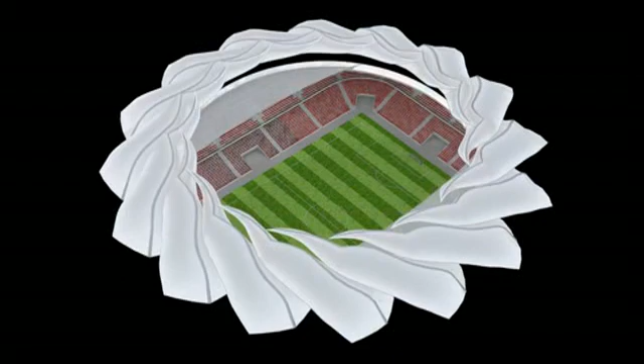The site is located in the heart of Warsaw on the bluffs and slopes of the Vistula River, where the city was first founded in the early 1300s. The model shows the site with its urban adjacencies in proximity to the riverfront.

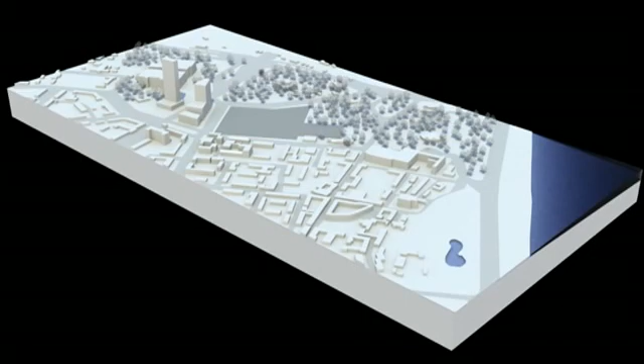This rather constrained 5-hectare site has to accept 4 major elements of the program for the proposed new facility: a 30,000-seat elite-class stadium convertible into a fully enclosed arena, a 5,000-seat basketball arena as a separate venue, a hotel spa facility, and a retail component serving both the guests within as well as the general public.

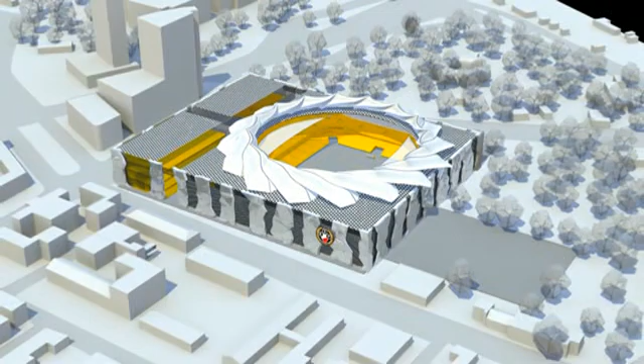The location on the slopes of the west bank of the river is saturated with history and closely intertwined with modern-day urban substance. The medieval retaining walls punctuate the sloping terrain and mark the highlights of history. The one common thread in the passage of time is the continuity of life as nature grows into the built environment and blossoms towards light and open air.

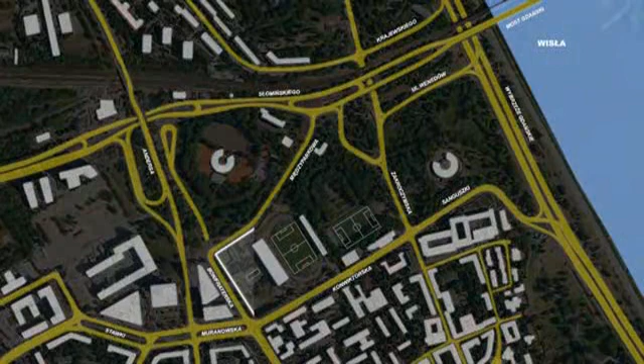The site is flanked by modern-day Warsaw to the west, the Citadel and Park to the north and east sloping towards the river, and the Old Town to the south. Public transportation in the immediate proximity to the site includes railroad lines, bus and streetcar lines, metro line, and city streets.

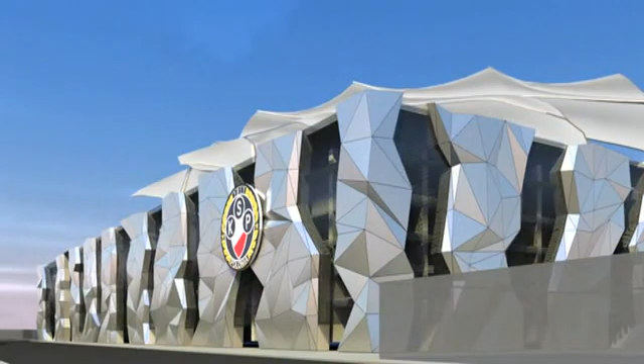The south elevation is the actual street front of the complex. Its exposure to natural light provides the most spectacular lighting effects throughout the day. Twilight inverts the lighting scene, and after dark, the light pours out from within through the openings between the solid blocks of the wall.

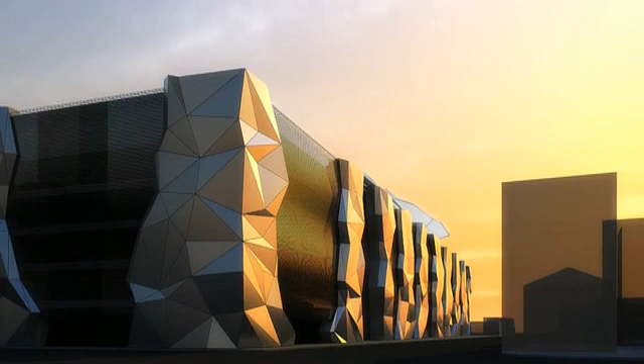The solids are clad in triangular steel panels, randomly deflected from the vertical plane in order to evoke the feel of a stone retaining wall, broken up over time by natural growth, which blossoms up on top.

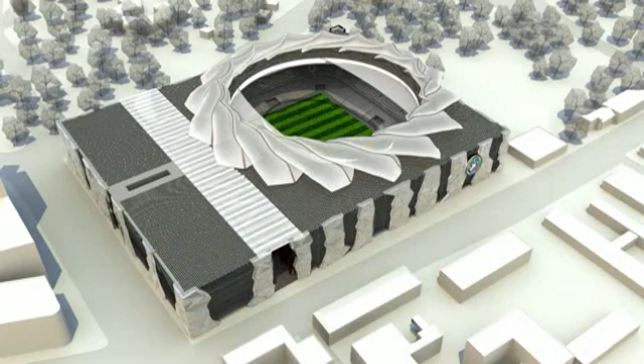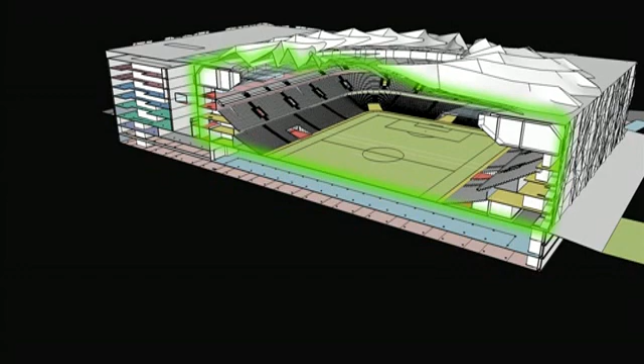3 levels of subterranean parking structure showing the blue zone reserved for buses and coaches, below grade spa, above grade the stadium, the long-side stands, office and VIP areas, 3 levels of retail and an additional 3 levels of hotel space.

The transverse section shows all parking levels below the stadium, a large underground access connecting opposite stands, and the length of the playing field looking across towards the main stand with VIP and mass media areas.

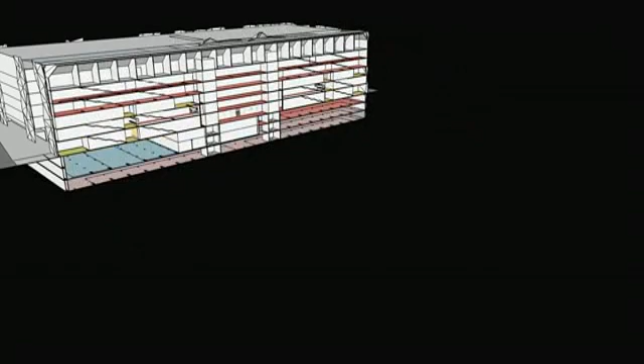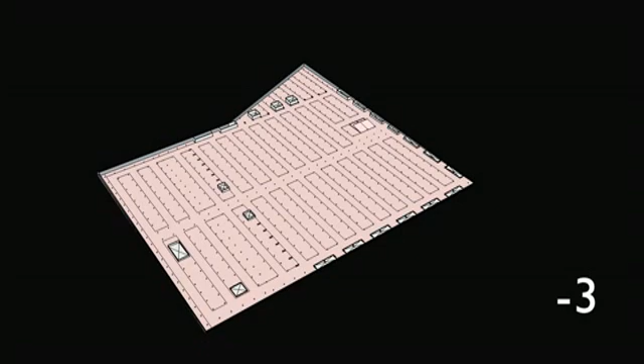Floor plans show the layout of every level in greater detail. Beginning from the lowest level of the parking structure, the facility provides approximately 40,000 square meters of parking space per level, including circulation. The bottom level is entirely dedicated to public parking.

The intermediate level is split between public parking and bus parking, which takes up space on two levels due to much higher vertical clearance. It also contains space for spa technology directly under the hotel.

The top parking level is dedicated to VIP and guest parking, with void over bus and coach areas. A portion of that space is occupied by the spa, vertically connected with the hotel above. This level also shows a 10-lane vehicular entrance and exit, where direction of traffic may be controlled depending on traffic intensity.

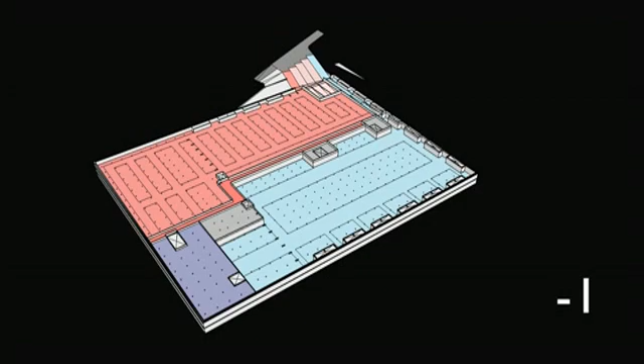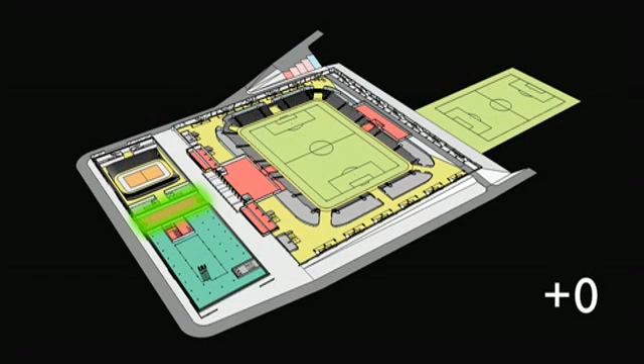Ground level bears the footprint of all major elements of the complex: the stadium, the existing club building expanded to accommodate new functions, the inner street for pedestrian circulation and drop-off, retail and hotel reception areas, and the atrium between the hotel and the basketball arena. The club's training field is left unaffected in its original location.

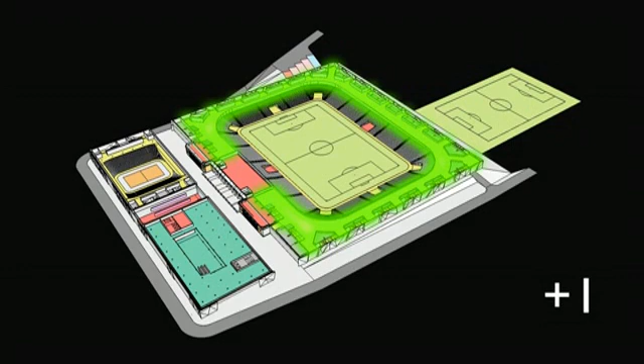The second level is the main circulation concourse around the stadium, where safe and easy ingress and egress is provided for all stands through 24 large exits all around the stadium perimeter.

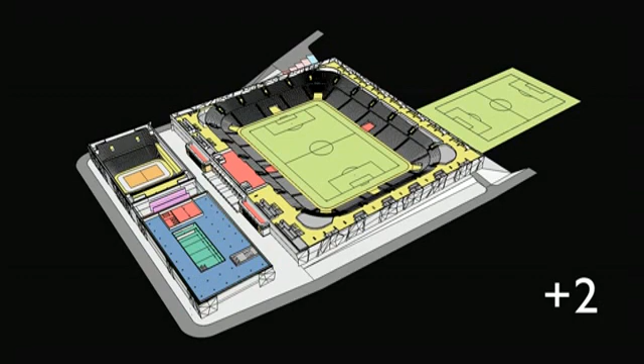Hotel functions begin on the third level, revealing the definition of the street space within, the atrium, and the remaining elements of the complex as they grow towards the top.

The fourth level shows the location of VIP exclusive areas and circulation restricted from general public, and the way they connect the stadium, the hotel, and the basketball arena above the street and above the atrium.

The VIP and guest areas continue on the level above, where skywalks offer picturesque sight lines throughout the entire complex.

The last level contains the top residential floor of the hotel, while the rest of it is taken up by technical and mechanical space on an 8x8 meter structural grid.

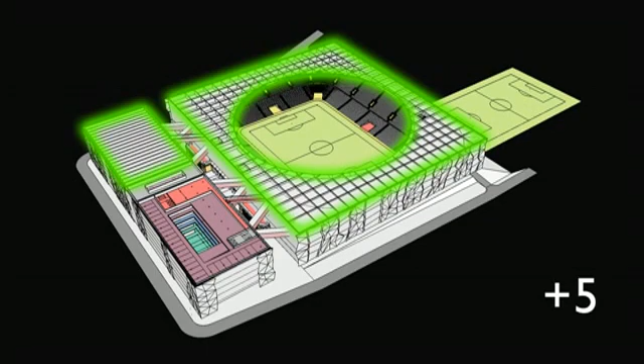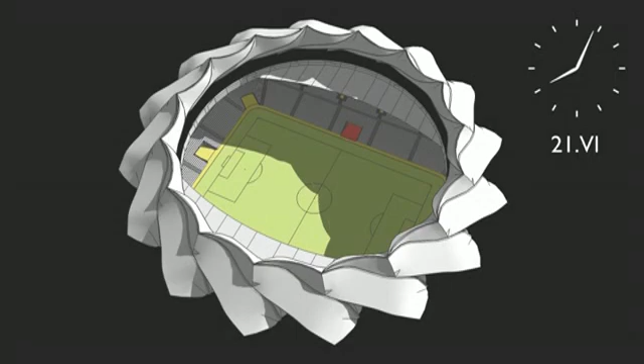The roof is crowned by the stadium enclosure and shows a large membrane skylight over the internal street. The solar path simulation for the summer solstice animates the sunshade during the longest day in a year, where the playing field is entirely shaded at 5 p.m. and all the stands are shaded at 5:30 p.m.

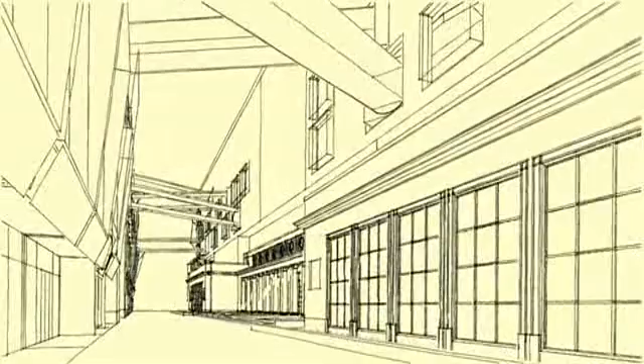A quick sketch tour of the complex allows us to appreciate the qualities of the space within. The inner street features the old clubhouse as the main artifact of the past, accentuating the original axial layout of this sports facility from

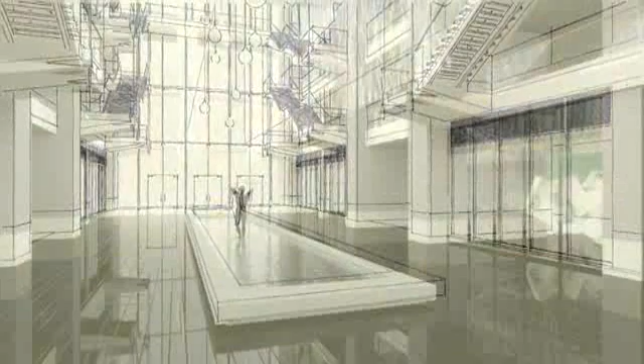1928. Looking across the street from the colonnade, the 5-story glazed atrium comes into view with its original fountain and reflective pool on the historic axis.

Two gigantic fiber optic screens are dropped from the ceiling, with large circles cut out to accept pedestrian bridges overhead.

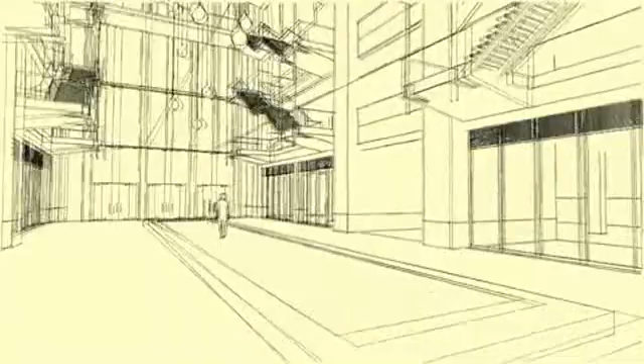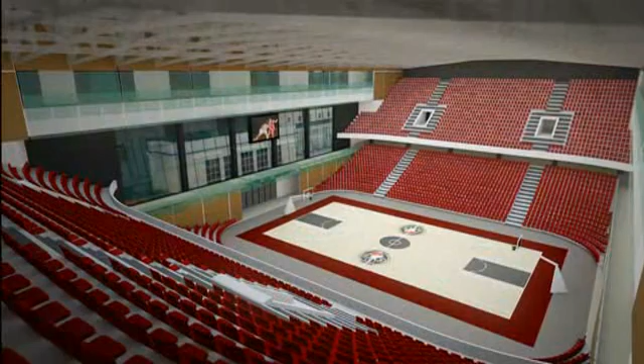The basketball arena, accessible from the atrium, is loaded on 2 long sides of the court, providing seating for 5,000 spectators and allowing daylight and sight lines beyond the hoop boards, looking towards the internal street on one end and the city street on the other.

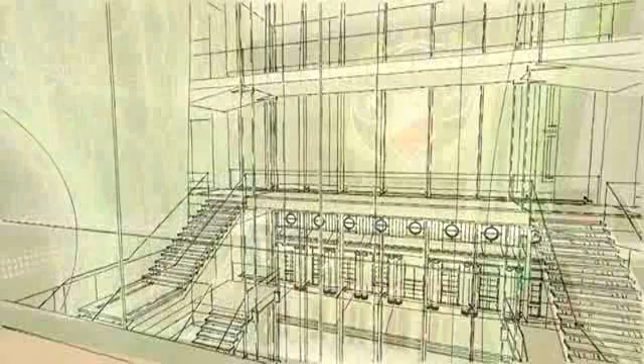The upper-level circulation provides access through the atrium to the stadium and the hotel via pedestrian bridges. Between the fiber optic screens, the club logo dominates the scene in a secluded space above the busy commercial ground level. Both ceremonial and team entrance to the stadium is right on the old clubhouse axis across the street.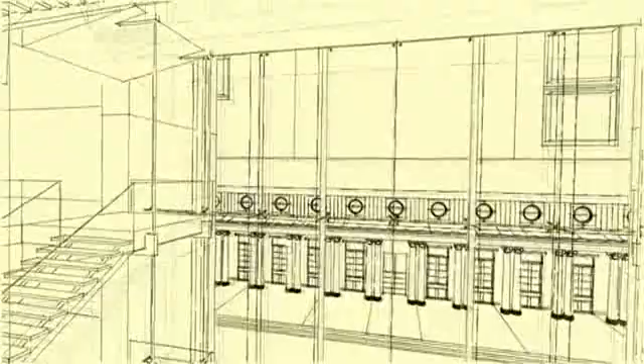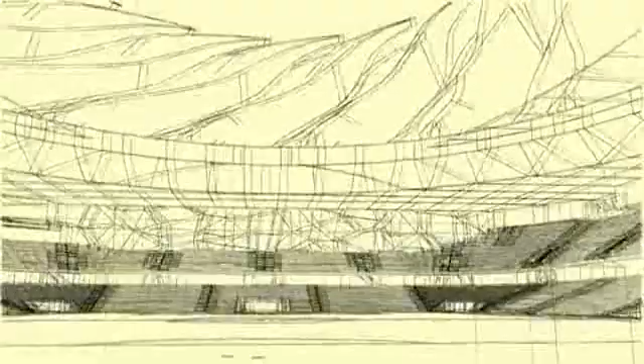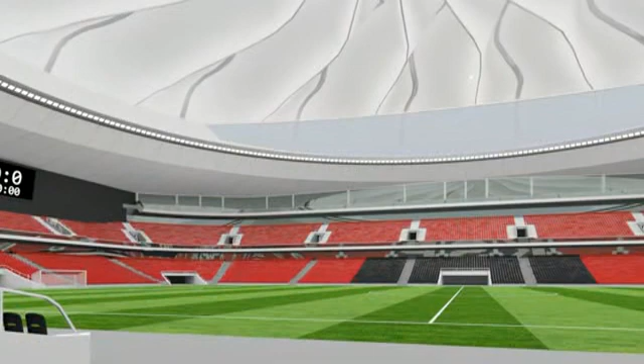The stadium yawns wide open with 30,000 seats in 2 tiers all around the perimeter of the field under a flower-like retractable canopy of leaves designed to open and close in a circular motion.

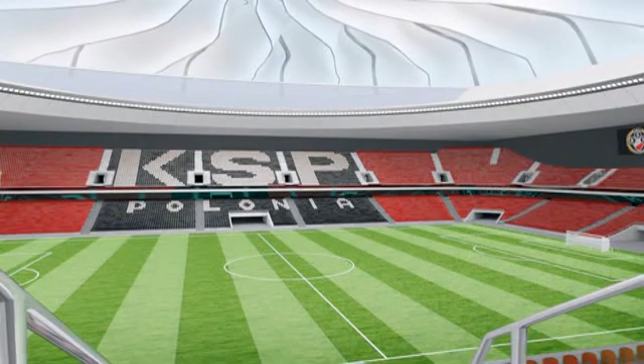The West Stand is crowned with a glazed array of VIP booths on 2 of the upper levels. Games and events can be observed from there very much the same as they would be viewed by television cameras.

The stadium offers unobstructed sightlines from every seat in the stands at the lowest possible elevation for this level of occupancy.

The quality of the surrounding space is aimed at emphasizing that the only natural limit in the spectacle of human achievement and performance is indeed the sky itself.